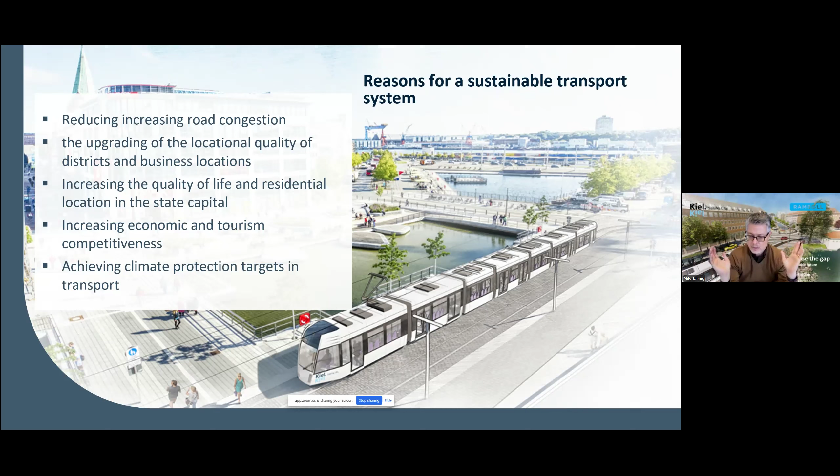Kiel has a lot - it's one of the largest harbors, also for tourism, but also ferries, some into the North Baltic Sea, quite important. And then at the end, the climate targets - this was the main reason.

Before I come back to the climate target stuff, here's the old network - as I said, it started in 1880. The largest network, shown in green, was 35 kilometers, more in the inner city area - Kiel was smaller back then. You see the water there - everything has to go around the so-called Förde, which at the end creates a little bottleneck.

It was more of an inner city tram-style network. In the 60s, shown in red, you can see it had already grown to the outside of the city after the war, but still within the city boundaries - so it doesn't leave the city political area. Going into the wider urban area, Kiel was growing significantly after World War II, and housing and building went outside of the city center.

The new network, shown in black here, roughly covers the network from the 1960s - 11.7 kilometers. So the old network routes were still partly used, at least in the dense urban city areas, for the new ones, because traffic flows and so on have not really substantially changed. This is quite interesting, and here's a fun fact, a very positive one.

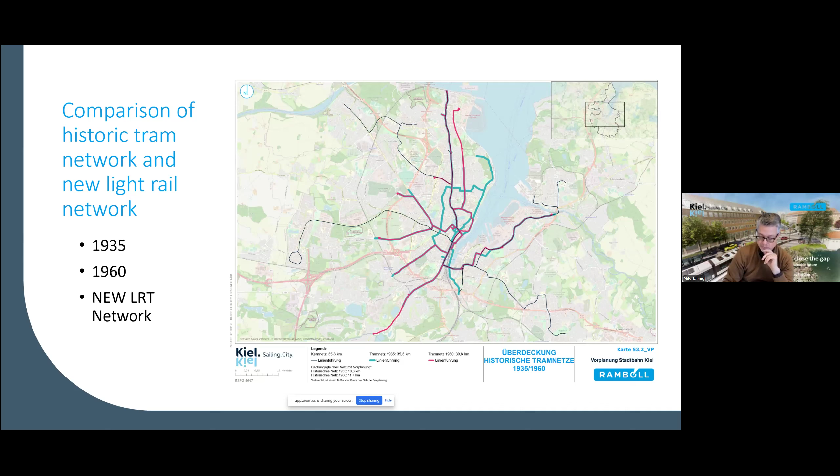Here you see the city council where we made the final presentation in November 22, and the nice little brochure where we presented our case for light rail.

Now for a second, I will come to the alternative which we had to look at between 2020 and 2022. There were people in the political environment saying a tramway is too expensive, there are a lot of construction sites in the city, it will not be affordable, and it may not bring the benefit, so we can do it with modern buses, electric buses. Kiel is relatively well known for a pure electric bus system in Germany.

This works not too badly. On the other hand, there are good reasons why the modal split for this bus system cannot achieve what we definitely need for a shift towards public transport, to move more people from the road network to public transport. So this is not the answer, the bus network, whether electrified or not.

But there were people saying, take BRT, 25-meter long buses, run them, and this will do the same. In a very large study, probably the largest ever in Germany to my knowledge, we demonstrated in very deep detail that the BRT system is also expensive and will not do the same. You have to run it more often than a 45-meter long tram or a smaller 25-meter BRT bus, even catenary or battery powered, which will not carry the same amount of passengers and will need to run more often. You need infrastructure and so on.

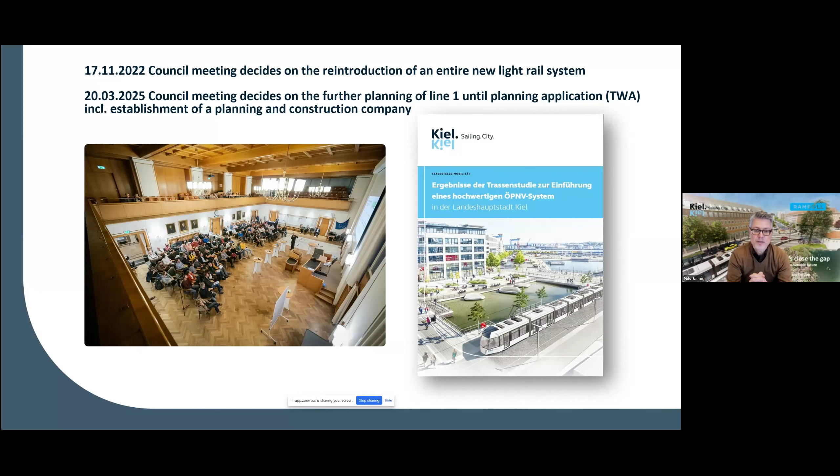So it was the politicians in this picture who understood this and followed our recommendation, which you see here, to say okay, the BRT system is not for free, it's not just a bus. It needs a lot of investment if you do it right, and then you don't get funding according to German law, which is not good because you cannot afford it in principle as a city.

And in the long term it's not as sustainable, considering the capacity reserve on junctions. You have to go far more into the road network and take capacity away for a BRT which runs more often and so on. So the tram is simply, from the long-term vision, the better solution, even if at the beginning the investment may be a little higher, and construction sites and so on will of course have an effect at a certain point in time.

At least the politicians were clever. They understood this and followed us, and decided on the 17th of November 2022 to reintroduce the tramway to Kiel. This was a great day and evening.

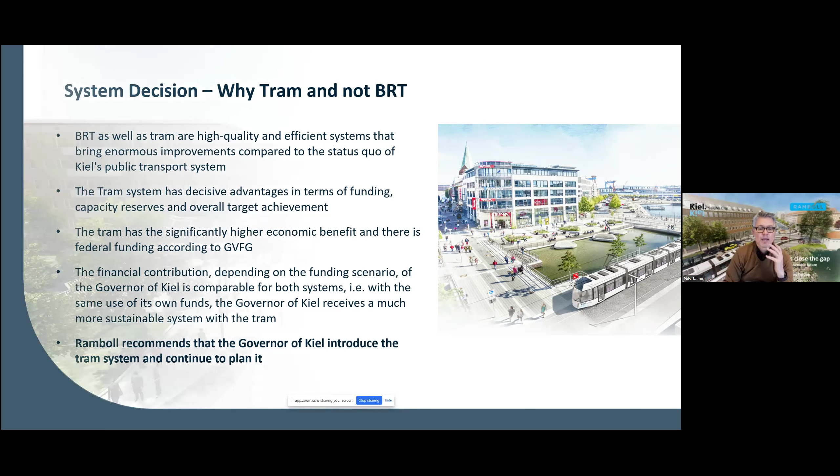So we also produced, based on our drawings and planning, a lot of visualizations and films, and I will show you one in a second, to convince the public. Now I will tell a little bit more about the tramway system, what we have done, where we are, and what are really important success criteria.

For this system in Germany, we have roughly 59 systems running, but in the last 10 years some tried to reopen and were not very successful, also due to political pressure, as it was not possible to push it through in a unified manner. The idea is this is a change for a city, but you need long-term momentum and to keep it, because if there is a change in political majority, the next administration should not easily stop it, otherwise you can never invest into a system over 10 or 15 years.

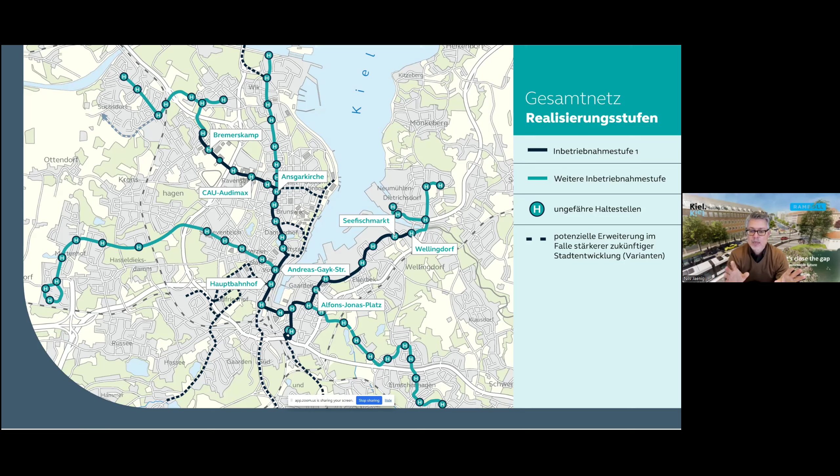Here at the bottom is the depot, today's bus depot, one of the bus depots which we will convert to a tramway depot. The dotted lines are possible extensions, to also demonstrate to those areas which will not profit on day one that we will not forget them. So we try our best to do more. And so far, this has worked.

The public participation - sorry, Niels. Can I just ask one question there? If you go back to the map, please.

One question about the network you showed there: how much of that is the existing network from, say, 1935 or 1960? Essentially, how much can you reuse, or are there buildings or anything else that has since been built over old rail tracks that you now have to reclaim as part of this network?

Yeah, fair question. So the old network was dismantled. There's only a little bit left, just for historic reasons. So we cannot use any old infrastructure anymore.

But the old last line in '85 was running here from the Kiel Canal, Nordost on the top, along the whole Holtenauer, to, let's say, Ansgarkirche, main station, around to Wellingdorf. So you could say we completely rebuilt at least the last network which was operated between '77 and '85.

The majority of the other parts is new, where we never had a line. For example, from Andreas-Gayk-Straße here to Mettenhof, this never existed in this way, or the black part here to the university and Bremerskamp and into the other areas here. So this is new. I think of these 36 kilometers,

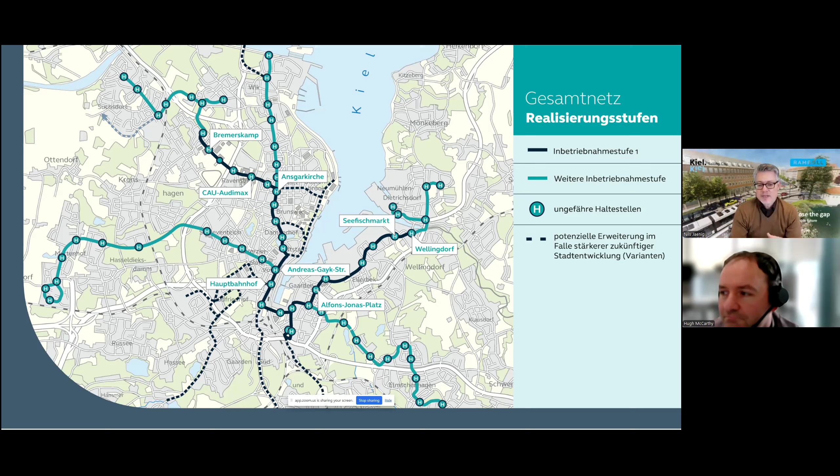Okay, that's - I was just thinking from the Irish context, where historic light or heavy rail lines have been closed for either 10 years or 100 years, and things have since been built over. So obviously the rail lines will be gone, but even just having the corridor availability, which is what you have here in the north-south direction, makes a big difference in terms of project delivery. So yeah, that was just one question I had there. It's not easy to insert this, I guess, but it's available, I would say.

Now, in order to achieve all this, we made a lot of - this is not a high-speed railway somewhere outside the city area. We will have effects on a lot of third parties, and depending on your point of view, depending on what external stakeholders want, this is quite different.

I would take forever if we talk about all this, but we really worked with all of this from day one. Kiel, for example, is one of the top cycling cities. They invest into cycle highways with a great network, and they're always ranked top 3, 4, even 2 in Germany in these rankings. So, to be honest, we are in a bit of conflict with cycling. They need space in the road - the top quality corridors need 4-meter width. And of course, we also want our own right of way with maybe 7, 7.5 meters. Suddenly there's no space for parking or road users anymore.

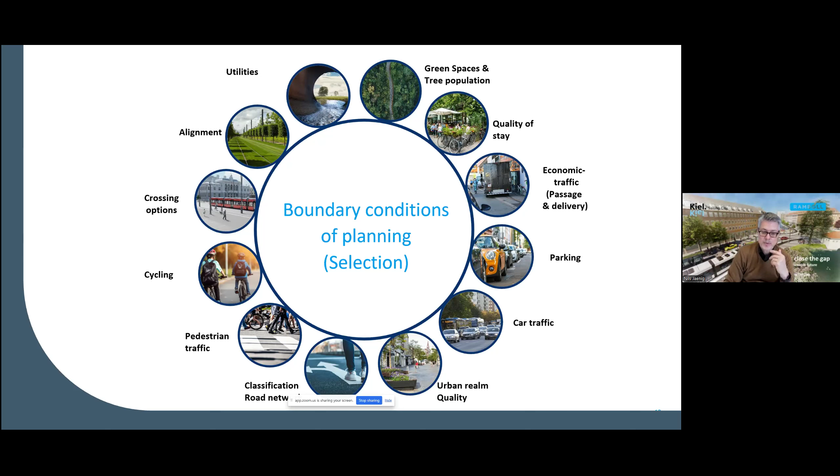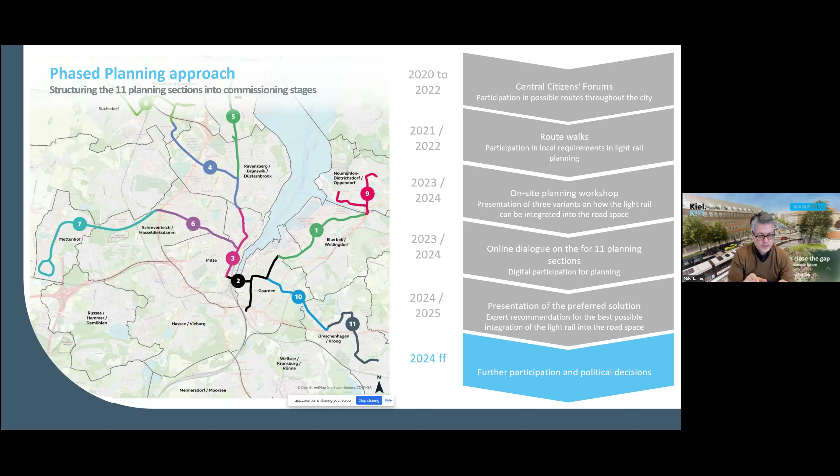And what we also did - a complete change compared to other German systems - we made plans similar to what we'll probably do for what has to be done. Let's take the Cork example: phase 2 in Germany isn't exactly the same, but very near, like in Ireland, to the planning application, or railway order. It's called Plangenehmigung in Germany.

The plans we have developed are already quite advanced, but the usual procedure is to discuss them all in the city with departments and responsible people, and then they are completely fixed, and then you go out and get comments. We have not done it that way. We said, okay, we build a plan, we have an idea, it's not complete, it's not fixed.

There might be issues with green stuff or with neighborhoods, we might need to buy some land for it. We went out with what we called a 60% plan, and told the public, here is your opportunity. We still have 3 variants. Give us your comments, we take them into account. It's not fixed, don't worry. And this perfectly worked, and we saved an enormous amount of time in the project by doing this.

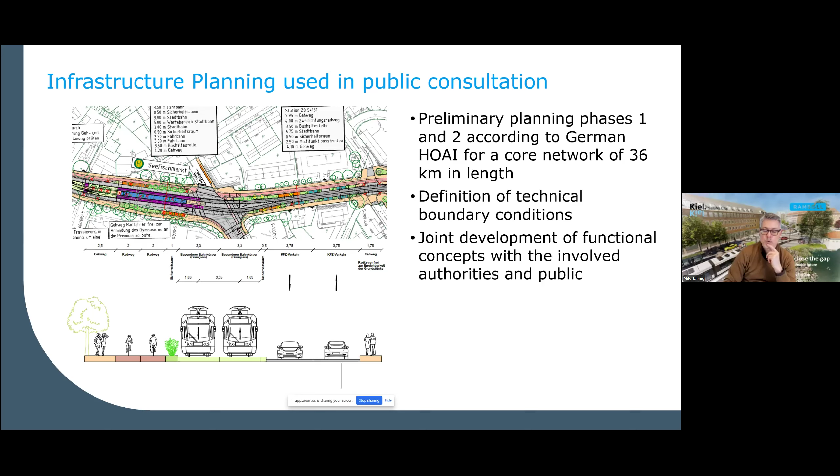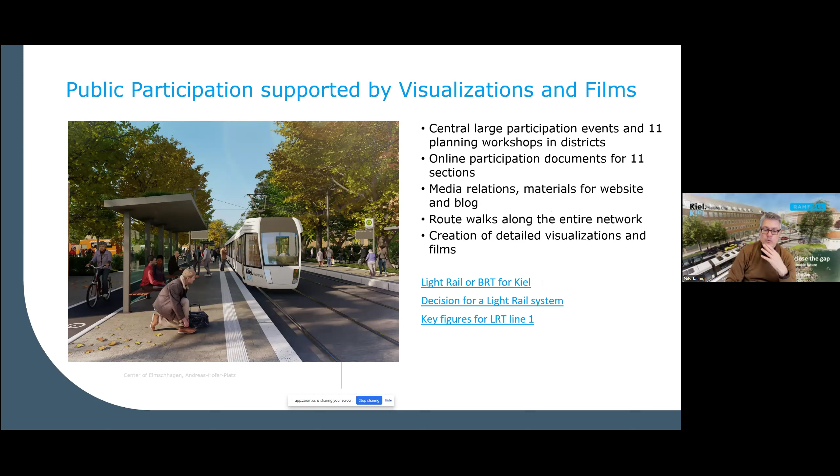These kinds of visualizations we often use, and we created this presentation, which I'll show on the next slide. I think we will distribute it, there are links in it where you can see all this. We used also our own visualization. Let's see if it works.

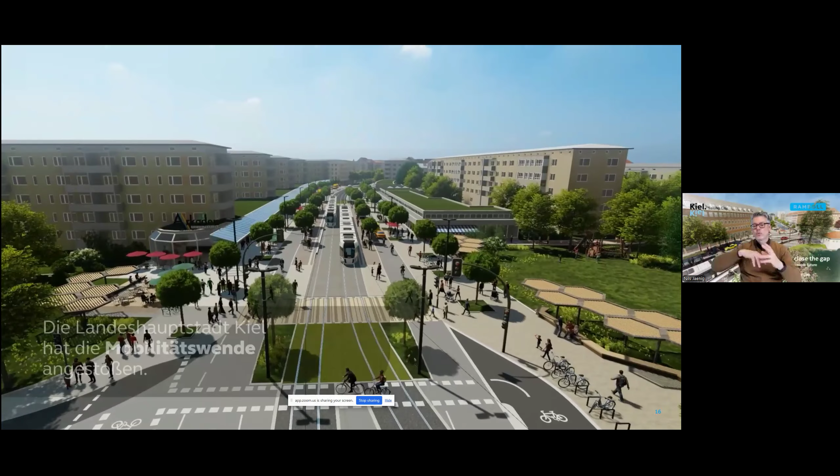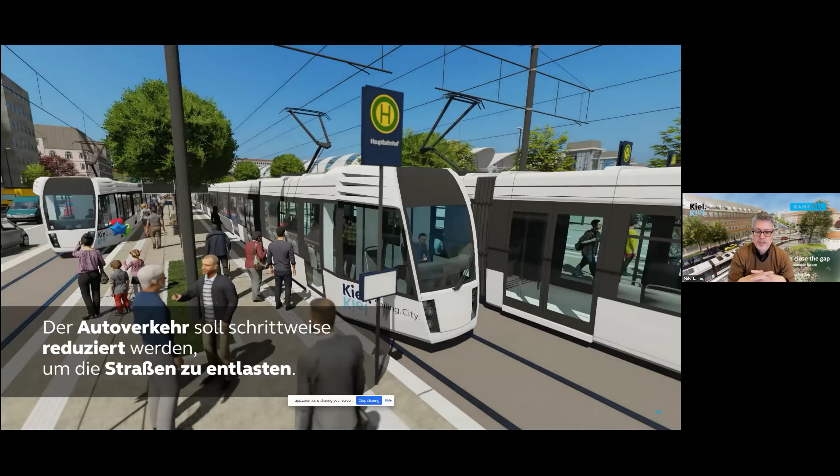It's a film, I hope it starts now. So it also can all move. Based on our planning, and the basis is really our detailed planning for this, the main station here, reducing car traffic by using a lot of these films and visualizations. This was convincing - people suddenly could see, oh, this is how it could look like.

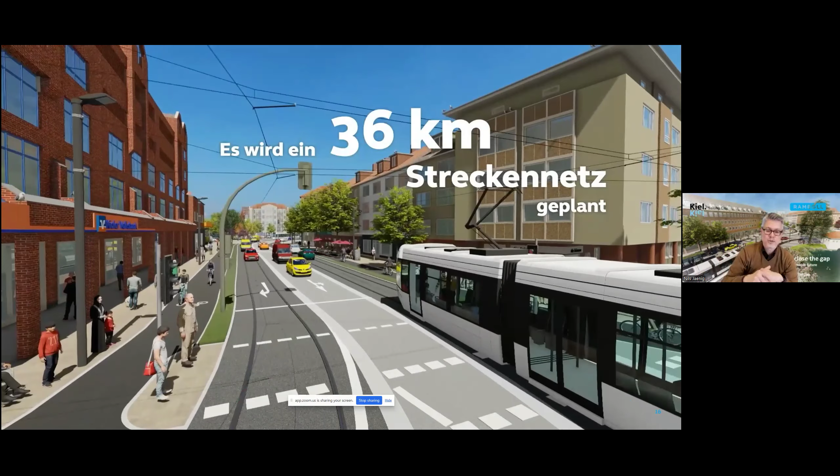But when you look at the catenary, this should also be the catenary. This was hard work to make this look like this.

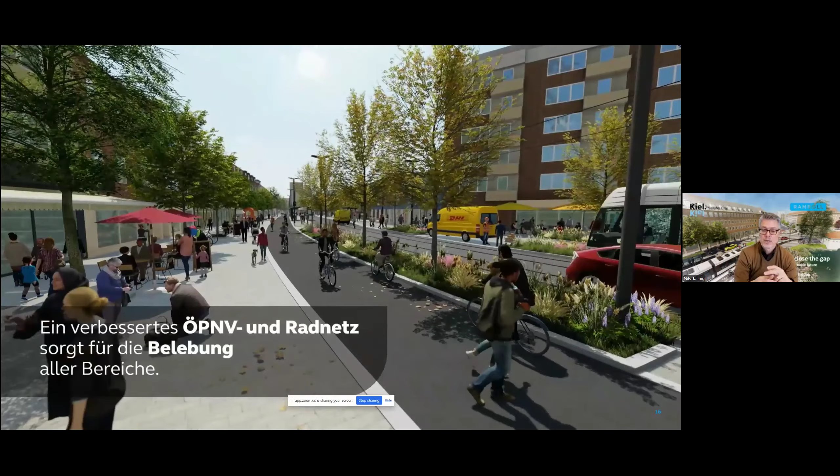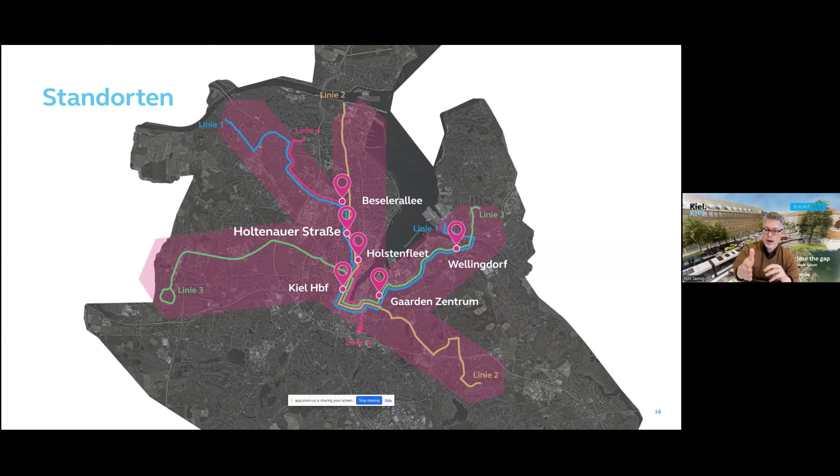So the network development, the logic behind it, the full network, 4 lines which you see here, how this could develop. Eastern part of Kiel, one street running to a place or the main station again. The idea of the 15-minute city we try to push. Here you see pedestrian cycling and all this stuff. Revitalization of the inner city area, which could be also greener with the tram and less car traffic. And some core areas of the network where we do also more urban integration work.

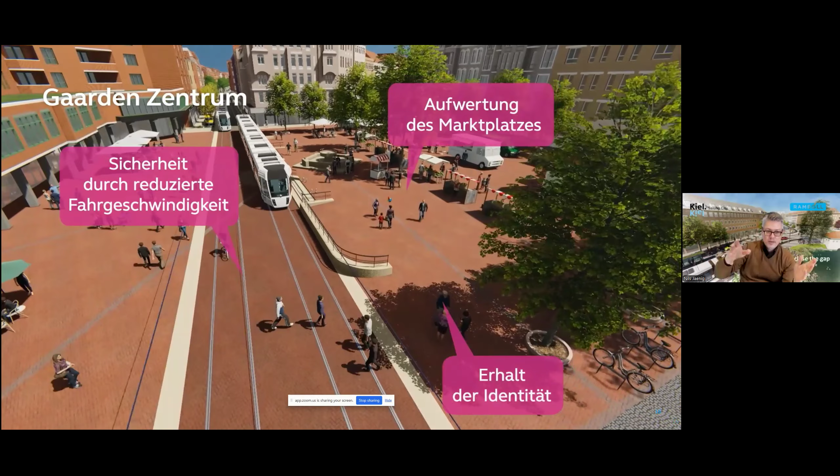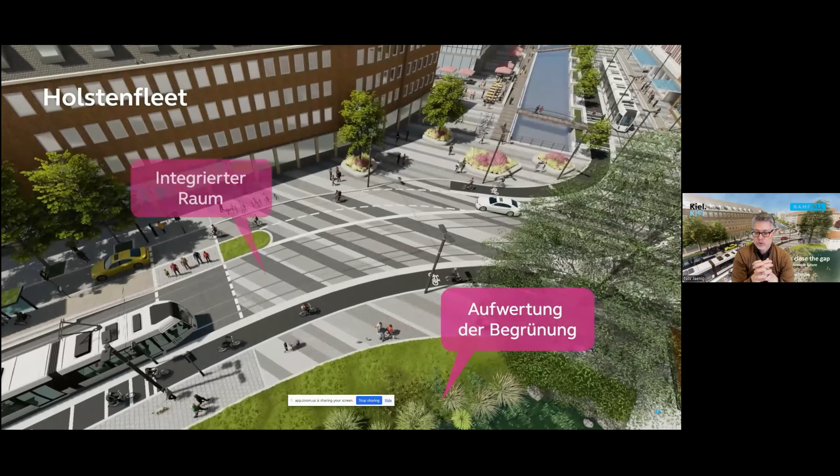When you look into it, not really difficult to see with the trees - this was the main station on the old postcard. The Gaarden, the old harbor area, the Holtenauer Straße, bicycling, and we always try to push green, green, green. Rainwater management, so Regenwasser management. We push these arguments, but it's not only a transportation system, it's by far more.

Just have a look at it a little bit - gastro. We made several of these films, which you can find on the website kiel.de/Stadtbahn. You find all this, the links, and you find also a lot of documents. Let's see if it works.

Those of you who can read German, of course, this is a little better - they are in German, but all the planning from us is also public. So all our documents, reports, plans, whatever, it's all on there. I think this was quite an important part of the success where we are now.

Now I would come - let's see where I'm time-wise. Okay, a little bit. Some details about what we did already.

This network will have a severe impact on the road network and its capacity. What you see here is our network with all the junctions, the traffic light numbers, where we will, of course, try to get as high priority as much as we can. We know that's not possible everywhere, but we made a lot of local simulations in VISSIM. We had a citywide network model in Visum and made runtime simulations based on all this in detail. And the city has recognized, oh my God, we need to change more or less the whole traffic light environment. But it's also an option to modernize it and bring it to a high level, including state funding.

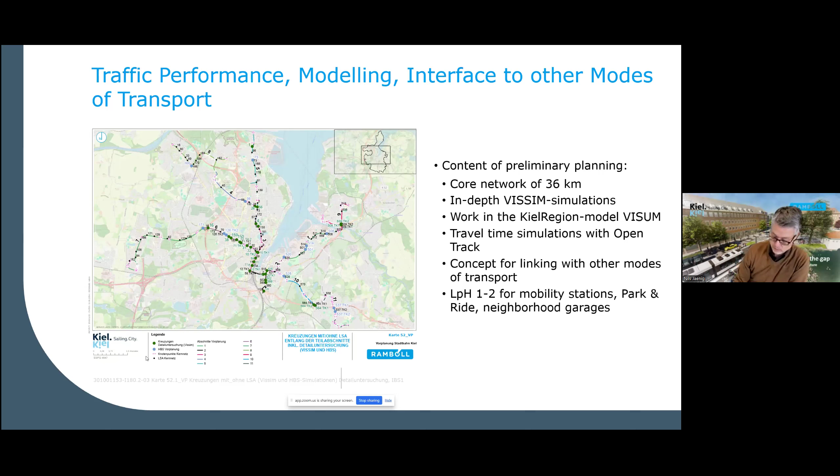And the traffic in the city still needs to flow. Just because we like tramways, we cannot close all the streets. This is not possible. Car parking, I said it in the beginning. So there was an agreement that about 10% of parking lots or parking spaces in an area of 400 meters, left or right, the corridor may be lost. Let's call it like this. This was from one of the political parties, an agreement that they support this.

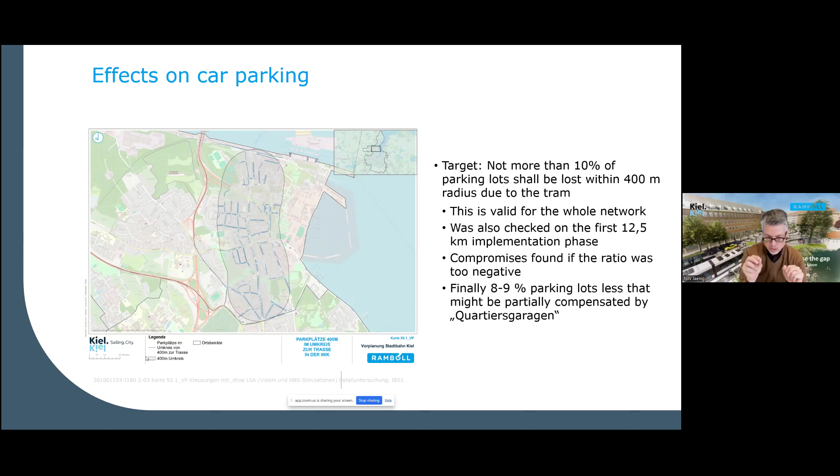So what we did is, of course, the calculation. We even did some countings, around our tram, this is one of the areas to check, all this area by area. In some areas, of course, it's more difficult than in others. But overall, we had, with the introduction, 8 to 9% losses, and partly we then proposed local compensations to mitigate. This worked also, that we got not people who say I cannot park my car anymore, I don't like the tram. This we were able to mitigate, I would say, quite okay so far.

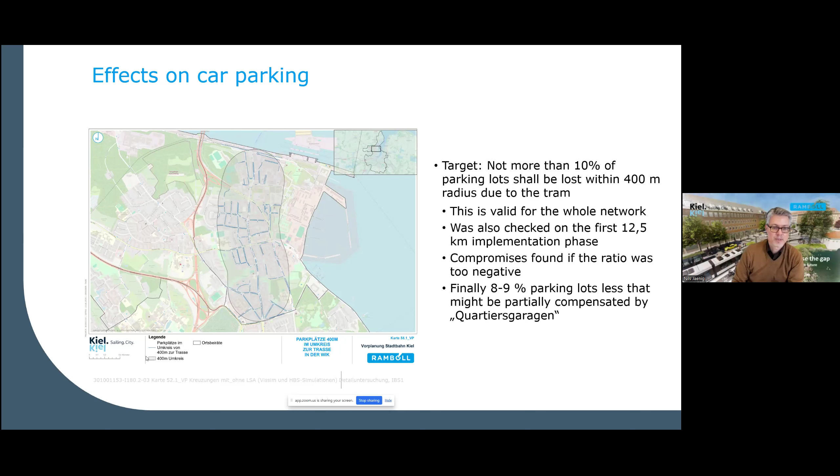And we had a target, 18, 20 kilometers per hour. In the beginning it was a little higher, but we saw this is difficult, average speed. And this plays quite an important role, how fast can somebody move from A to B. This goes into the socioeconomic calculations and how people change from car to tramways. And the faster we are, the better it is for all this.

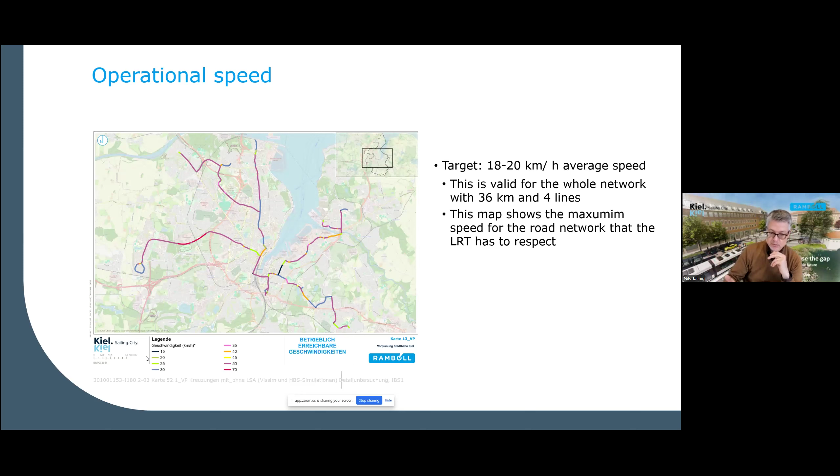On the other hand, we cannot close all the junctions just to get full priority. In the inner area, we have 4 lines, each one has a 10-minute frequency, so there's every 2.5 minutes, in principle, a tram per direction. So some of the junctions, if you get full priority, I will not say you can close them for cars, but it's clearly reduced. And there's a balance which we try to find.

The run times, I said 18 to 20 kilometers is our speed target. Here you see of the complete network the 4 lines with the distance and the simulated, with a dynamic Open Track model, VISSIM. So we, in an early phase, put a lot of effort into getting this right. Average speed, and depending on the nature of the line - those who are more inner city, for example line number 2, is clearly more on the slower side, but still 18 is okay-ish, I would say.

19. Line number 3 is the one who's leaning outside and can run on longer stretches, really with 70, you come to 22 kilometers an hour. But overall target, more or less 19 to 20 in average. This we want to achieve, and the business case is calculated on this. So for me, this is also for the future, the next phase until planning application, quite an important guideline, because it's easy to make compromises and go away from it, to each risk mitigate it and make another curve.

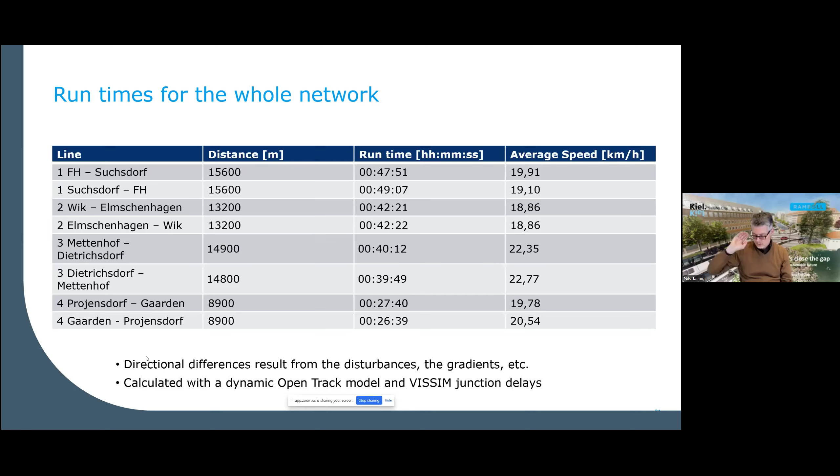And just to add this a little bit, the French philosophy is like this: they are not so fast, but well integrated. We try to keep at least this speed in order to have this robust business case and demonstrate always also with the next planning phases that we would try to keep it, to have this runtime idea, that we are still as fast as we can, and fight for each and every junction to have priority. This we try to do.

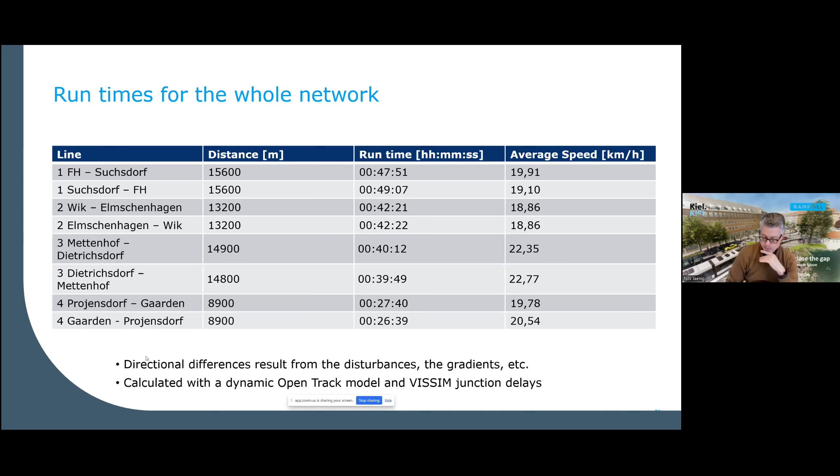So these are the speeds. I think they are not so different in Cork, from what I saw so far on the information which is available. This leads, with these speeds, to an investment into a number of vehicles. We talk here about 2.65-meter wide vehicles - those are the maximum capacity according to the German BOStrab, the law which is allowed. 45-meter length we want to go, because then we have really a robust starting capacity.

10 minutes frequency, according to our demand modeling, was okay with 4 lines. This leads to about 37 vehicles plus a reserve. Let's see how much we will have at the end. The first implementation phase has, I think, 16 or 17 vehicles.

Then you have your turnaround times, an ideal timetable efficiency around 85 on average would be great. It's not always possible, but on average it's quite good if you could reach such a timetable. For this we need stability of the timetable in the best possible manner, and this is achieved through own right of way, priority, and a little bit of buffer.

For example, at the main station in the timetable we gave 1 minute extra for each line in order to manage small delays, so that you can still stay within your timetable. When the trams run behind each other, they should not run 1 minute apart and then 8 minutes with nothing, so that this works in the long term.

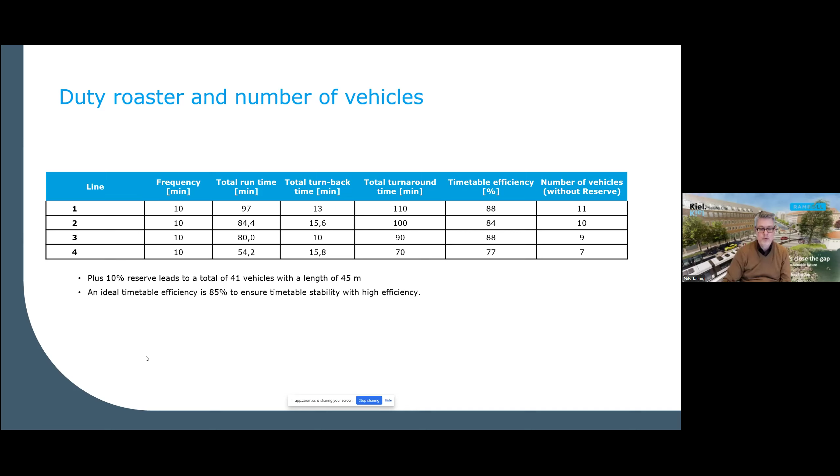2 more slides, I think, then I'm finished. Power, we need power, so it runs on 750 volt. We had discussions about whether we could run without any catenary. From our point of view this is not efficient, since battery cars of this weight - a tram fully loaded could be 80, 90 tons - would need a battery of such weight to move it. So at the end, it was okay.

Also we had no big criticism to have a classic catenary in different ways. But we'll come to this in a second. A little bit due to EMC reasons, we had 2 sensitive areas around the universities where we also need no catenary, or maybe sectioning.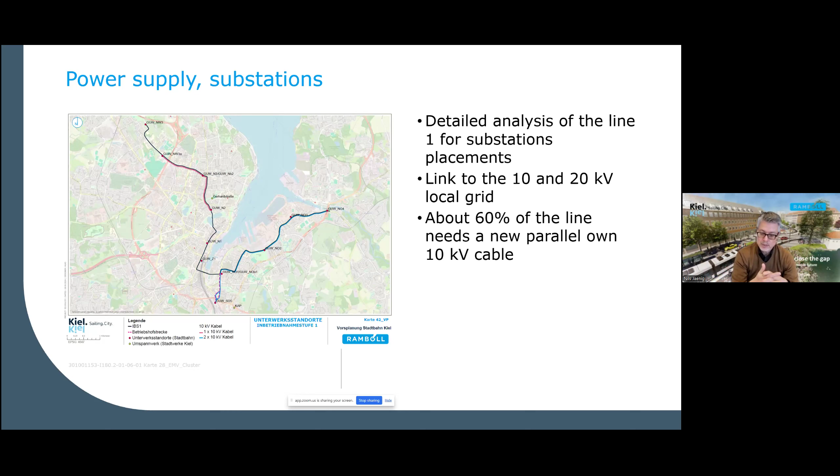I talked about EMC. We had 2 areas in the universities with a lot of sensitive equipment, not covered by the standard EMC EC rules. Around a 750 volt tramway you have a field around the overhead catenary. Depending on the amount of traction energy you draw and the number of vehicles operating, you simply have fields, and they can disturb this sensitive equipment.

We made a large assessment of this because we need the universities as positive stakeholders, and when the tram is seen as a risk to their freedom of research - we had a system in Germany, in Heidelberg, which completely failed due to this and could not be built. There are positive examples, but also negative ones.

You find several others in Europe - Utrecht is famous, Lund, or also Copenhagen. They all did something, and we did it in the same manner. The stakeholder university was a very important one for us, so we had early conversations, listened, and made a survey.

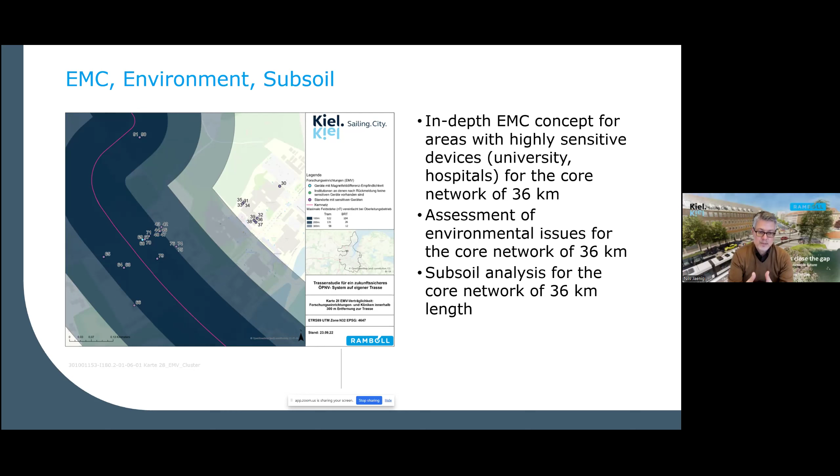You see all these little dots - these are installations or future installations. We took this on board and figured out, oh my God, this is not so easy. So we have 2 areas without catenary - let's see how it develops. But in order to have a good balanced approach with these stakeholders, so that they are positive and want the tram, we don't disturb them. This is a compromise we made, even if it's costly.

At the end, again, you see this little graphic on the top, urban development. This is the main station. Some of the initial hand sketches we did, where not everything is completely fixed, so this is easier to convince people also. All these dots on the card here were already in 2022 for the first phase, where we did a larger assessment of the options and the possibility to upgrade the urban environment.

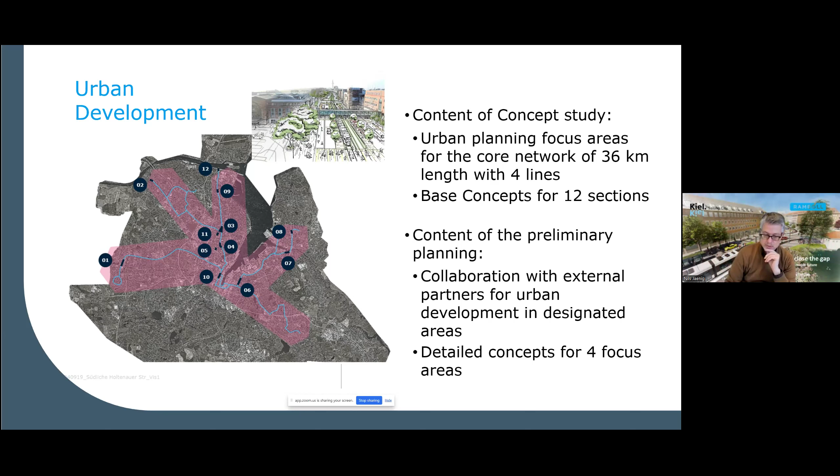And this, of course, created positive support. People saw this and thought, okay, when we get the tram, I get also this and this. So in principle, it's an investment, and nobody knows if we can afford all this, because it's not funded in the same manner. But it's the French idea of seeing more behind the tramway system. So we try to do this, and hopefully we can continue.

So at the end, two slides on cost. This is the first 12.5 kilometers. Maybe I need to make this clear, it's not the network. The cost is for infrastructure, for the planning, we need to build a new depot. It's not so expensive because part of the depot infrastructure is in the infrastructure track and catenary. The vehicles, you see in urban design measures. So we talk about, at the moment, a number total of 441, which is a bit below 40 million per kilometer, comparable to other international systems that were completely new.

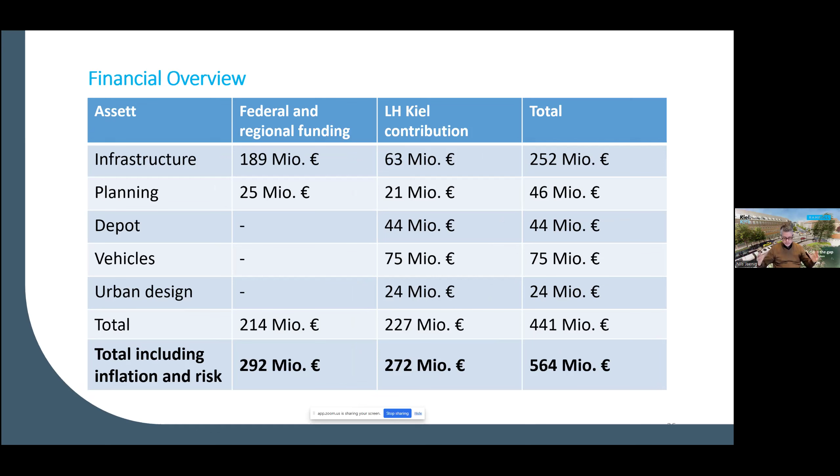But then it was a discussion, we will not build this now, we have 10 years to go. So opening is at the moment 2034-5, if we can make it, for the first 12.5 kilometers, there's inflation and risk. So the public number, which we then took, is 564, where also the local parliament had to decide about this, and they took this decision based on these numbers.

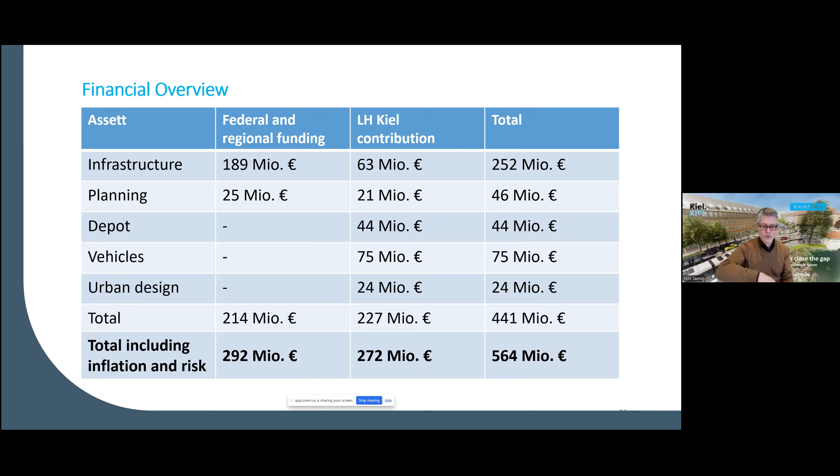So the target is now, for a German system, a relatively high number. Within the next years, to keep the planning in an area that we don't exceed this, or if we exceed it, not very high, so that we don't get this usual criticism. You start with a low number and then you go up to whatever. I think this could be possible, so let's try our best.

Last slide, I was not able to translate all this, but this is the cost benefit for the first line, 1.4. So I told a little bit, we have demonstrated this for all the different phases. They were all positive. 1.47 means for each euro you invest, you get 1.47 back on the procedures. It's a German procedure of this cost benefit analysis, which we all have to follow. There's no big flexibility in it. You get 1.47 out of it, and it has to be clearly above 1, and also with a margin needs to be demonstrated.

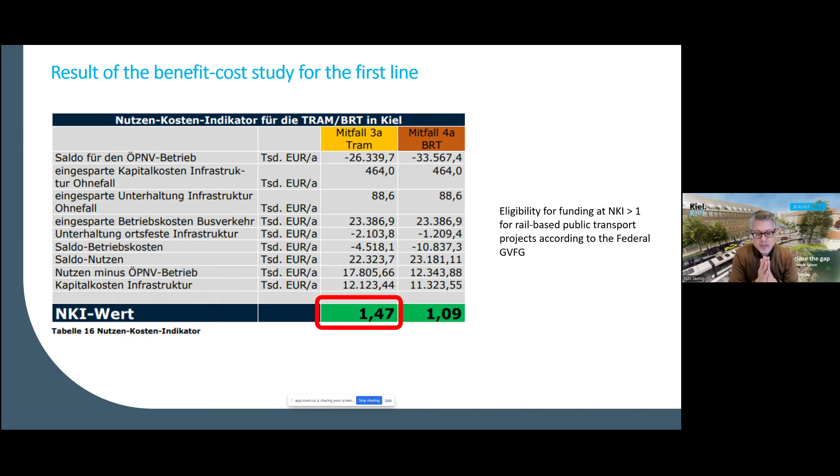If the costs get higher, are you still fine? So this is all in here, and it's a very robust business case for the state to give us funding. The right side, by the way, was at this longer time the business case for the BRT. So we were able to demonstrate this, and also it's another reason why the costs should not go up too high, because then this will go down, because normally if you have more costs, you will not have more passengers.